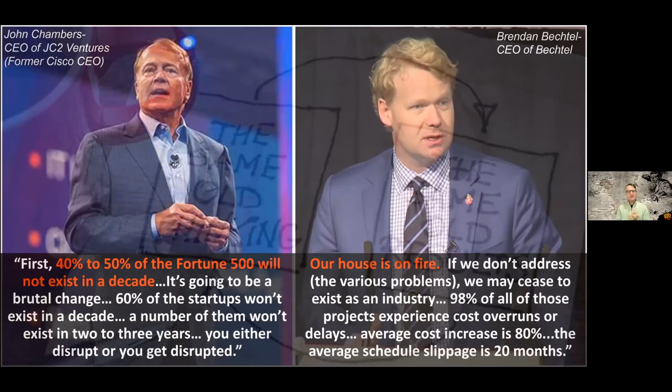So it's not just me saying this, one guy sitting in Texas trying to stir up trouble. John Chambers, former CEO of Cisco, is basically saying 40 to 50% of Fortune 500 companies will not exist in a decade. There's a reason for that, and it's not COVID. It's what we've been doing, it's what's been going on, and it's what's going to happen to these companies, whether they like it or not, in the next 10 years.

60% of startups won't exist in a decade, that we're looking at today, that we're really excited about today, that we think is the end-all be-all of today. And then you have one of our own, Brendan Bechtel, CEO of Bechtel, and many of you have heard him say this: our house is on fire.

From an industry standpoint, we're losing in so many ways. We're losing good people. We're losing efficiency on projects. We're losing schedule. Frankly, we're losing money.

And the reason for that is, to be honest with you, not all of us. It's the things that we keep thinking we're supposed to do in order to do something different. And it's like quicksand. It just keeps bringing us down and down and down. And I'm begging you to fight that.

What does it look like when we're fighting these inefficiencies? Well, take just seven of the Fortune 500 engineering and construction companies across the Dow in the U.S. You're talking about just 1.8% of a huge number, 77 billion in revenue, but 1.8%. Why can't we go crazy and try to get 2%, or why can't we go even more crazy and try to get 5 or 6 or 10% of that? I mean, the margins that we're okay with is insane.

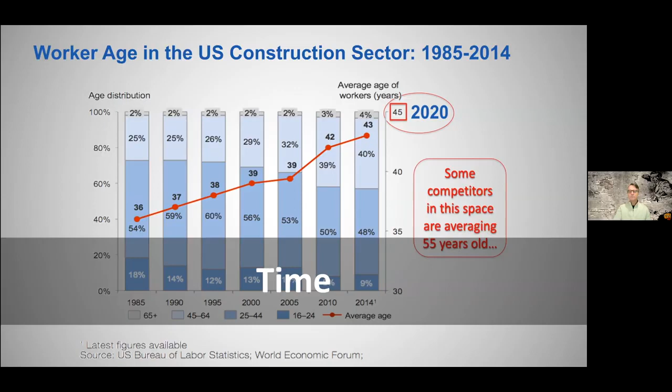Plus, we're fighting culture on a daily basis. At the very least, people are telling us to stay put, do not change. And at the very worst, they're telling us to slow down. I'm begging you to fight through that. Put up your fists, put up your dukes, walk right through that. Don't listen to that. We need to speed up. We need to go faster.

This is not about throwing more warm bodies at a project. It's not about trying to kill ourselves. I'm still talking about integrating, about innovating, about adoption of all these tools, all these procedures, all these processes that are in front of us. Adopt them faster, do better work, and do it quickly.

When I say new and different in my definition of innovation, what do I really mean? Is there anything really new or different? I'll talk about that in a minute, but every day is the future. You hear a lot at conferences and on LinkedIn, talking heads like myself, saying look to the future, I'm a futurist, we're going to be on different worlds in 100 years. I'm asking you to look just to tomorrow, the next day, a week ahead, a month ahead, a year ahead, because every day is the future, and I want you to take advantage of that. But having said that, let's for a second just look backwards.

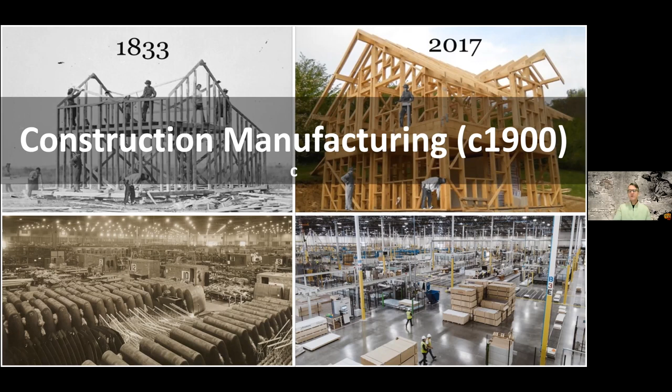Modular construction — I'm a huge fan of modular construction. I've created and spun out a couple of smaller modular construction startups. I am the poster child for let's go modular. What's crazy is we've had this since 1940, 1950. Amy and many others know this perfectly well. We're super excited about it in 2020, this is the latest and greatest innovation, but it's really not. We've had it for 50 years. Why in the hell have we not been doing this for the last 50 years and doing it excellently in 2020?

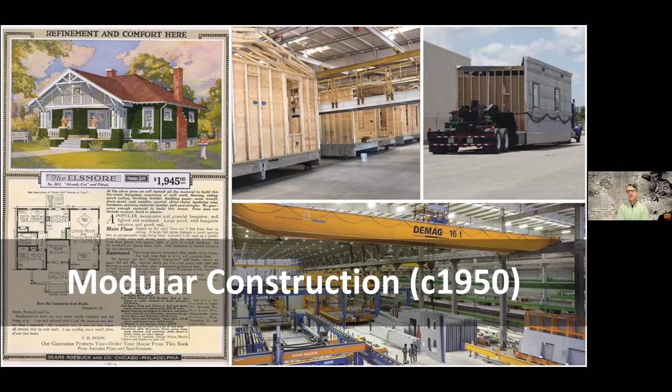All of these things that we think are scary and new and full of change today in 2020 have actually been here. We just haven't been told about them, or shown them, or allowed to pull them onto a project. I'm begging you to break through those barriers and tell everybody, look, we're not inventing anything right now. We're adopting, we're going forward, we're taking all of this great history we've had and actually making it viable.

Industrial robots, in the manufacturing sense, aren't just for putting together a Volkswagen or a BMW. It's for putting together a building today, tomorrow, the next day. Since 1950, for 50 years we've had this.

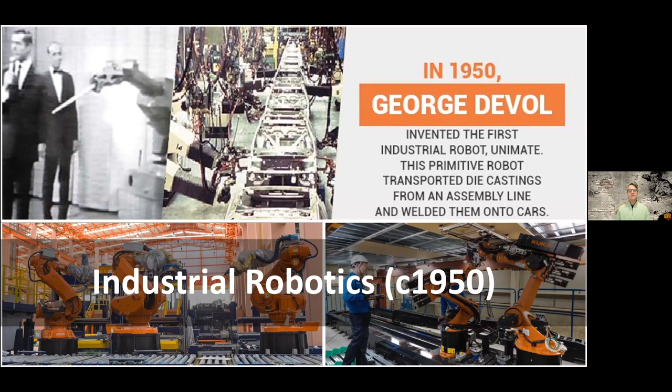For some reason, we want to pretend that we're unlike everybody else and can't use those innovative tools. By God, we can and we should, and we know how to do these things, and we should put those in our arsenal and innovate like crazy starting tomorrow. Even construction robotics - this is a huge field that's going to make a huge difference in the way we design, let alone construct.

This photo with Kennedy on the left-hand side is not a photoshopped photo. He's strolling past viable construction robots in the 60s, and here we are today getting super excited about something that's been around for 40, 50 years. But for some reason, we've been fearful of pulling it onto our industry platform, onto our job site, into our designs. I'm telling you, there's nothing to fear here. This is all good. This is all innovation.

This is all opportunity. Having said all of that, how do we scale all of this into our world now? It's not that we haven't had it - we've had it, and we've got it today. Now, how do we scale it into the world that we go through?

Sort of like I've been talking about, this innovation continuum that we've been on since the dawn of time - everything that we have today that we think is required, the cell phones, the cars, the PPE, the processes, the procedures, whether it was a document or an artifact, was impossible at some point. Some crazy person jumped out there and did some kind of prototype, some silly thing, and it looked impractical, and we laughed at them and pointed at them, frankly. But then a spark of genius showed up in each of us, and we thought, maybe it's possible. And then we said, wait, it's not only possible, I want it. We should have that. That's genius, right? And then it became scaled and required.

I'm asking you to jump into that. Everything should be expected. We should expect everything, to be honest with you. We should go after everything. We should have everything because we can. We're smart enough. We can do this thing. We can innovate the heck out of our industry and expect everything that you want can happen, can come to fruition, and it can be required.

Scaling this innovation is really important. And I'll give you the one secret word to scale across every industry, let alone ours: experiment. This is the one thing that I think our industry is really, really loath to adopt, and it's the one thing that has held us back for 50 to 100 years. That's experiment. We're so worried that we're going to spend money on things that don't work, and we're so worried about failing fast, or frankly failing at all.

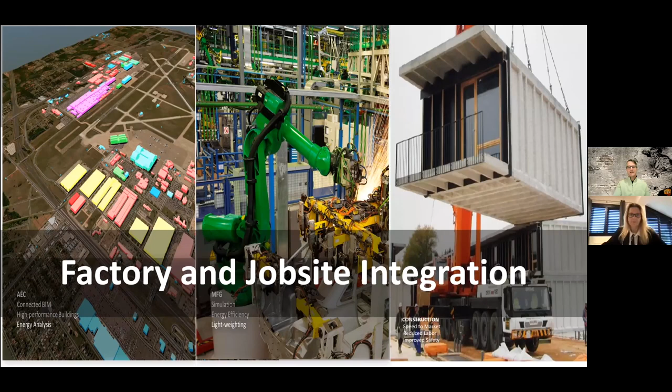So really understanding how we scale our business compared to who our real competitors are. And our real competitors are data competitors. They're competitors that are looking across at a platform perspective, not a project perspective. This is really where we need to be looking at: factory integration into the job site, IoT across our industry by 2035. All of these things are going to integrate and interconnect.

And finally, what does all of this mean? A significant impact that you are bringing to our industry. By 2050, 10 billion of us are going to be on the planet, 7 billion of us in the built environment that all of you design and create, creating a demand of 2x energy. We collectively are building buildings at 1,000 per day, and that number will only go up. The spend on what we do is only going to go up. Trillions and trillions of dollars in infrastructure. We're 6% of the global GDP demand.

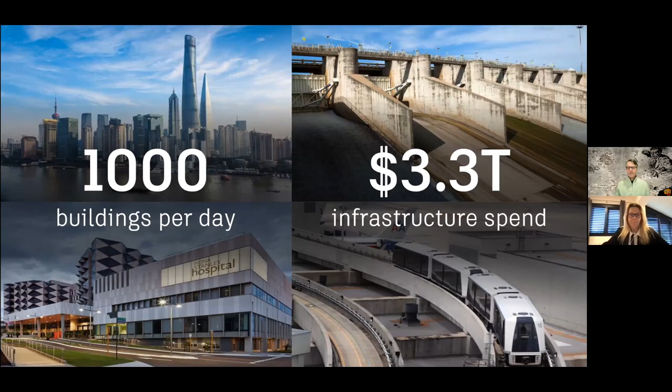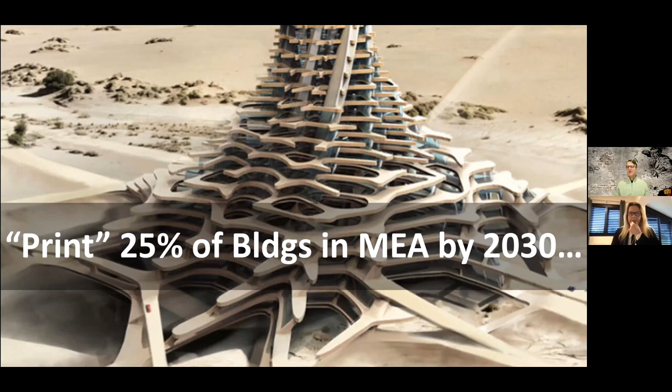And then you've got regional demands and requirements, and Ireland is in this as well, just as the United States is in EMEA and APAC. But you look at MEA, and they're talking about printing 25% of the buildings across their region by 2030, and that's nothing. Our own U.S. government, whether you love them or hate them, has basically put a flag not in the sand on planet Earth, but in the sand on Mars. We're talking about inhabiting Mars by 2030.

And even if you think that's silly, even if you don't believe that's going to happen, putting a flag that far out and failing gloriously is going to put us and our industry so far ahead of where we are today that it's going to have a huge significant impact.

So my call to arms here is: get in the ring and innovate everything, question everything. Look at what you're doing and try to make it not just a little bit better, but in a crazy, crazy, crazy amount better.

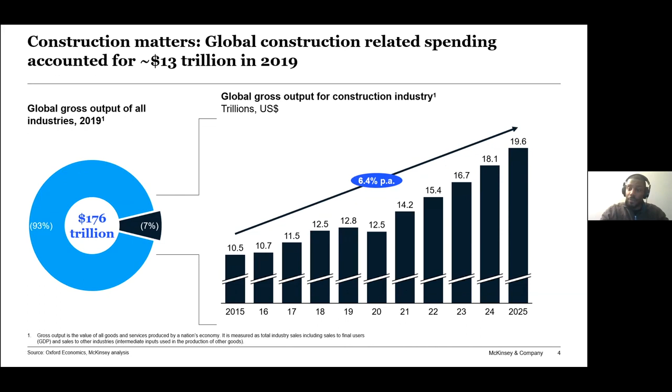So to put a point on some things that Chris said, construction is massive. If you think about construction as a national economy, it would be the third largest nation state in the world, behind the US and behind China. It was $13 trillion, I believe, of spend in 2019. So this is an absolutely massive industry, critical to the global economy. I won't belabor this point because Chris talked about it pretty eloquently during his talk, but there are some pretty significant...

...outcomes and dynamics that drag us down as an industry. When we think about the construction industry overall, it's a really fragmented industry globally. Everyone works on a project-based approach. There are generally misaligned contractual structures and incentives, and a lot of use of temporary contractors and staff. I think this contributes to risk aversion in the industry: a big general contractor is in many instances not necessarily executing - hands on hammers - a project, but managing the project and managing the risk around it. So you've gone from people investing in truly building the asset, with technical and project management expertise, to people managing the risk around the building of the project. And when you're a risk manager, you are naturally much more conservative than if your entire business hinges upon your ability to manage out risk.

So where does that get us? Lagging productivity growth, we've talked about that previously. Slow innovation and digitization, low profits - I know Chris quoted a number around 1.8% on average globally, we're looking at 4 or 5%. So that's not as bad as 1.8, but still nothing to write home about. And then low customer satisfaction overall - budgets and schedules are routinely overrun.

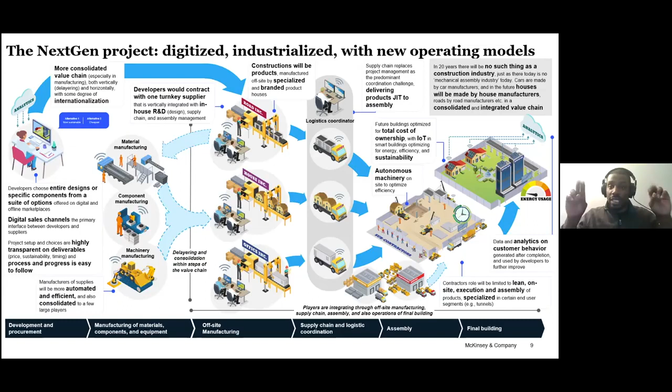Finally, when you look at contracting and execution, contractors and folks on site will need to produce a project at a much higher level of productivity, with what you'd consider the buzzword lean construction—execution and assembly specialized and focused on site at a much higher degree than we are right now.

So let's look at a couple of case studies about how this is actually happening right now. We made the statement that developers are choosing entire designs or specific components via digital marketplaces. In a sense, that's happening right now.

I picked a random manufacturer on the platform, so there's no specific focus on CEMEX here. There are lots of different building material suppliers. NBS Chorus and NBS Source effectively enable you, through BIM objects, to choose and specify the specific building material and supplier.

In some cases, this happens way back in the design and specification phase of a project. You have architects literally saying, I want CEMEX dry silo mortar in the masonry that's going in this area of my project. Through NBS Source, they can then go to that manufacturer or building material supplier and source the materials earlier.

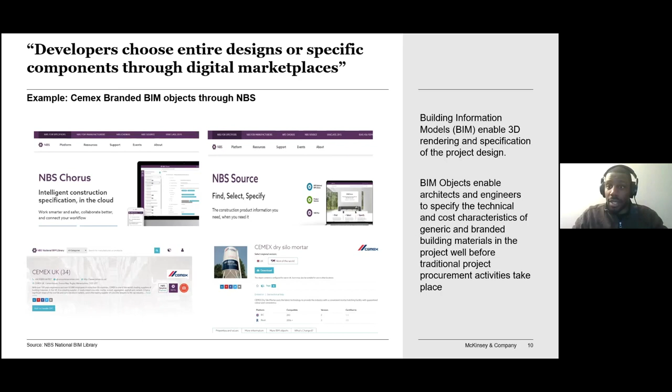So you're seeing a couple of things: developers shifting this procurement function earlier in the process by leveraging building information models and BIM objects, and the rise of digital marketplaces, as opposed to needing to go through a general contractor or even a distributor. You're able to specify these things and then access them digitally.

Developers will contract with one turnkey supplier. The market's global poster child for this is Katerra, but there are other players, most notably in the UK, Top Hat, that follow this model, where they own the production of the building end to end, all the way through architecture, design, and engineering through execution. While these are newer models, they won't be the last to adopt this approach. Now you're building a Katerra multifamily real estate asset, or a Top Hat single family home - a branded project, as opposed to just a bespoke house that Joe's Construction built somewhere.

Supply chain and project management are the primary coordination challenge. This is an example from 2019 in England, where Mace Group built factories on top of two high rises in Stratford, and had to manage the supply chain to bring building materials onto the factories, subassemble all the different components, and then do the fit out in each of those stories. They completed 18 stories in 18 weeks without raising the cost of execution.

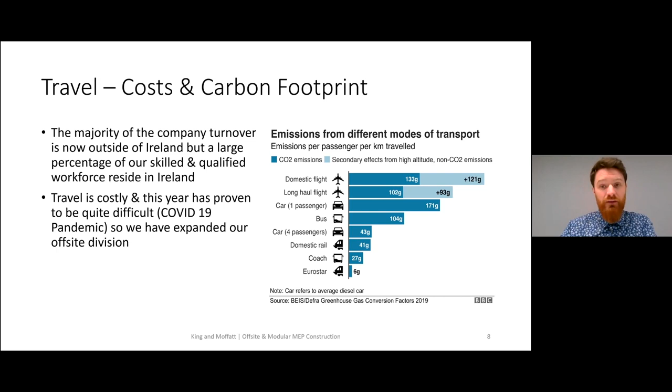Another reason we started looking at this was delivery issues. We find that doing some of the work off-site really eliminates issues we've had with deliveries of material to site. Deliveries from wholesalers usually never arrive when they're promised. So you could have a team on site go up and install brackets, and then the cable ladder might arrive a couple of days later, and the basket for your ELV stuff mightn't be there, so that might arrive a couple of days later. What's happening is people are returning to the same location on a construction site on numerous occasions to try and finish one task.

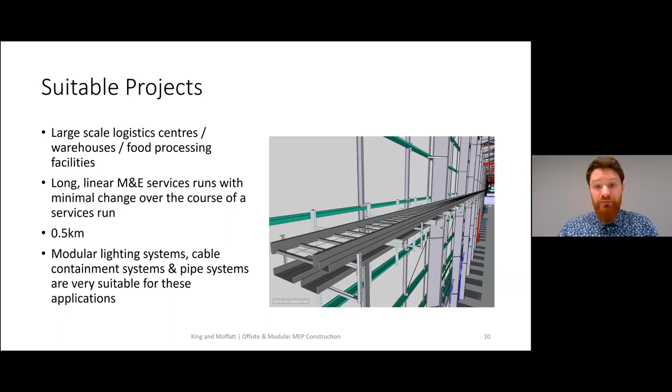Again, modular lighting systems, cable containment systems and pipe systems are very suitable for this. We've noticed an increase in safety because you're undertaking all the work in a controlled environment, and you're eliminating things like weather-related dangers associated with a construction site. If buildings aren't sealed you have wind or frost or other trip hazards, and falling from height accidents - you're taking all of those out of the mix.

There's less competing with other trades for workspace when an area becomes available. What I mean by that is sometimes when you're a subcontractor on site, like mechanical and electrical, you might have sprinkler or refrigeration, people putting in drywall and trying to get drop rods in, but you could be waiting for a concrete slab to be poured. What's happening then is everybody's racing into the same corner of a facility trying to get their services in, so it's increasing danger and it's less productive.

The most suitable tools for the tasks are permanently installed in a fixed location in an off-site facility, with all the PPE there beside them. You have dedicated workstations for assembly and cutting. So rather than cutting supports with a battery-powered angle grinder, you have a dedicated saw that can cut through full bales of unistrut, maybe 50 lengths in less than a minute. Again, it's saving time and it's safer work.

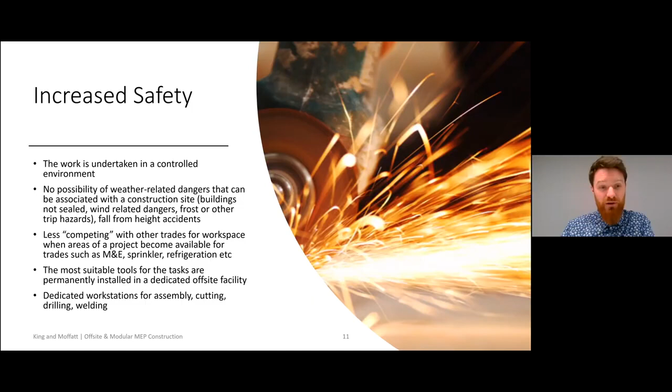Project programs and handover dates - these programs and the dates we have to hand over buildings, it's getting tighter and tighter every year. What's happening is we're getting into the jobs later, but the handover dates aren't changing. Sometimes we'd have weeks to get in and do a full install for a client with the main contractor and have to hand everything over.

Having the prefabricated M&E service modules ready for dispatch reduces the installation time on site. We can be building those while the structure is going up, the concrete is being poured, the building is getting sealed, and then as soon as the team on site are ready, we can have them on site within a day or two. If the job's in Ireland, it's within a day. If the job's in the UK or Germany, you can have it on site within 2 days. Instead of having to start everything from scratch on site when the area becomes available, you're really speeding up the time on site by doing this. All of the M&E modules are pre-assembled, so they just need to be lifted into position and connected to the structural elements. It's really reducing the amount of time we have to keep people on site.

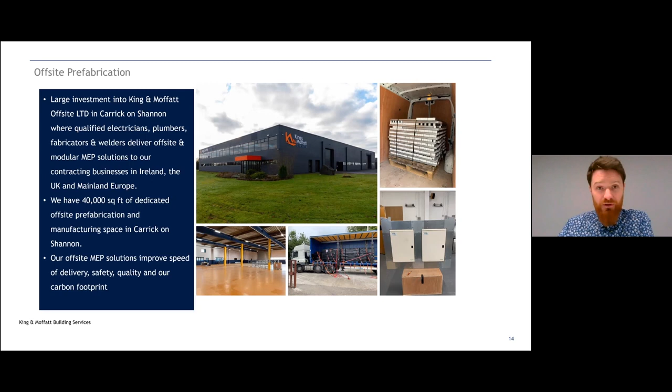I think coordination is the key to success when you're an M&E subcontractor. Without this, you're taking on huge risk, because you could go to site, have to do it off site and then have to do it again on site - you're really starting to lose time and money. So for a new build, I think the coordination with the other stakeholders is key, and we use BIM to coordinate with other stakeholders on a project.

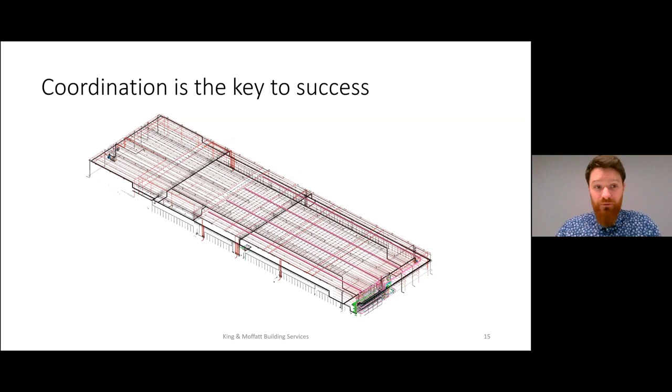We really try to have fully clash-free models before we start any work on site, or before we commit to building MEP modules off-site, because it's a huge risk for any company to take if you get to site and realize, well, this contractor hasn't delivered in BIM, but because of the regulations in this country, they can't move - they have to be in that position. You'll have to move this duct, or these pipes, or this cable containment. So that's why having a coordinated first-off is key for us. I think it's vital that everybody has bought into this whole process from the beginning of the project.

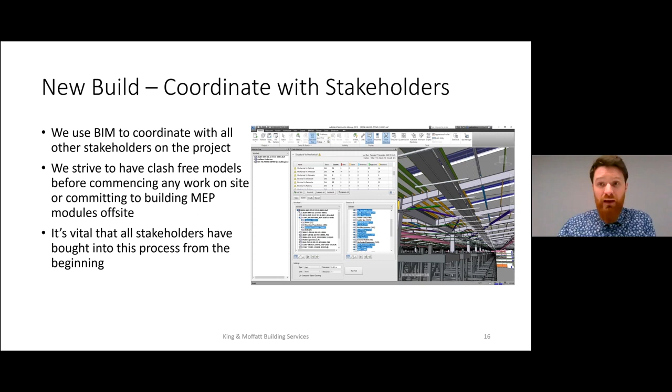For any existing buildings, we go in and laser scan them. Just a very short video here that will show a bit of the process, but I think after doing this, you have an exact representation of what's on site. So again, it allows you to move forward with confidence.

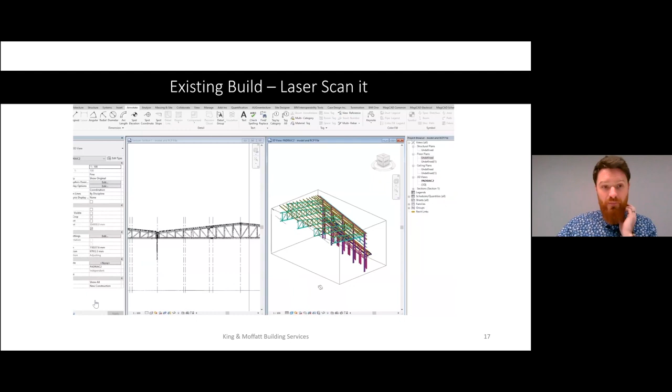So basically that video was if we were going into an existing project and it's not a BIM project and there's no 3D models available, but we still want to try and do as much as we can off-site. We go in to get a real picture of what it is, we laser scan it, and then bring that back. That gives us a point cloud, we build a model of the point cloud, and then we're able to coordinate all our services, supports, main routes and spines of services within the building, and we know when we arrive on site that it's all going to work.

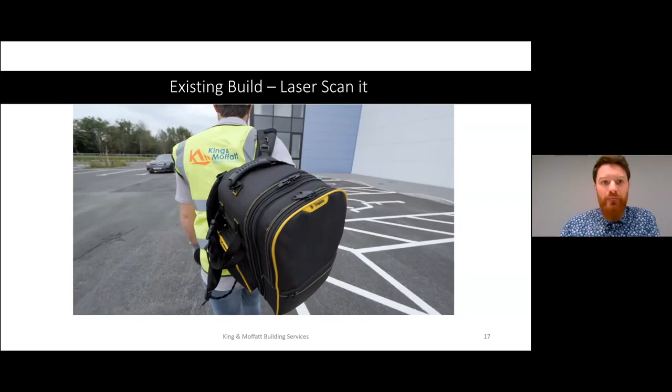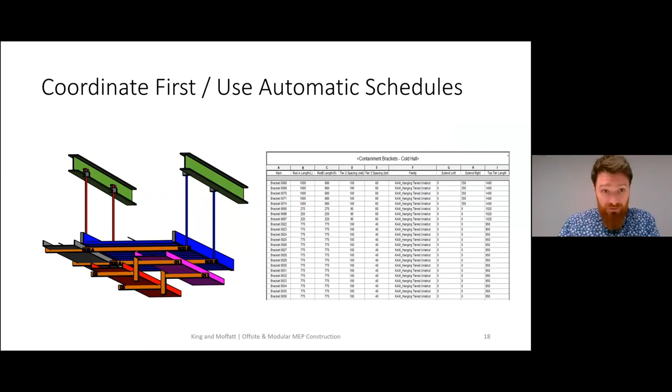We also use BIM to take out all of the information, so there's no manual takeoffs or manual counting because we use BIM. After we've built all the brackets, we're able to take everything out of a schedule straight out of Revit on the right-hand side, and that can go straight over to offsite. We've actually developed this further in the last couple of months, and we'll go into that later on.

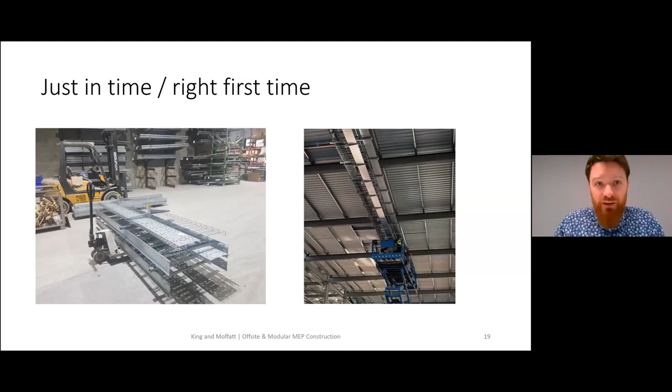We can get all of our stuff to site in time, and it's right first time when we do this process. Another thing is we can quickly check the stock levels at offsite before sending module information over. So before we send the details of a linear run of modules, the MEP modules, over to offsite, we can quickly send them information from a schedule out of Revit, and they can check if they have enough stock for all the different types of supports, whether it be pipework, cable ladder, or data basket. They can very quickly establish that we need to order more of this because there's a delivery coming, and the modules are going to contain this.

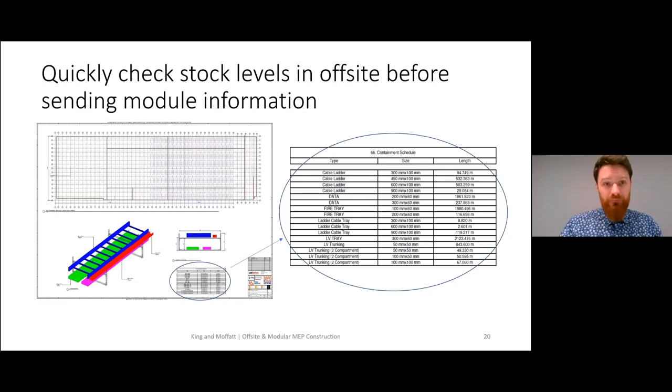A big focus is on combining the M&E services and the modules that we send out to site. We send a team out, and if brackets or modules are put up, we think it's pointless to have another team go out and do the exact same thing for the mechanical element if someone's already gone up and done it for the electrical element. So sharing bracketry, doing all the load calculations and the structure, and getting them approved before you install them on site is very important. By doing that, you're saving time and money, and eliminating double jobbing associated with it.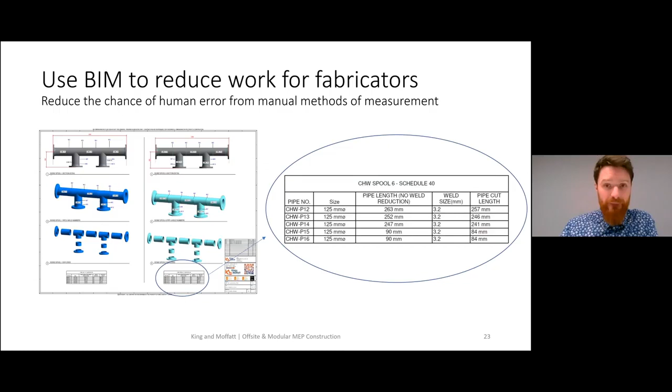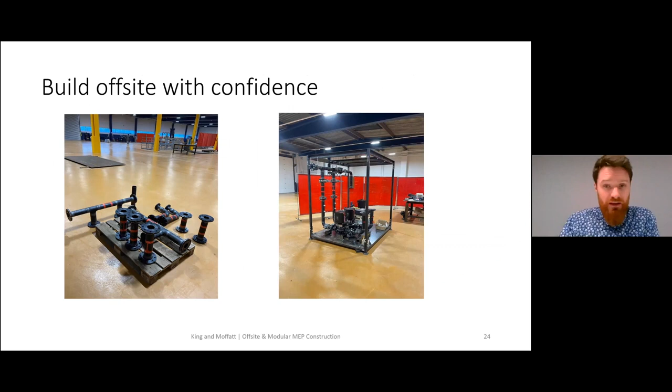There's no manual takeoffs or manual measurements needed if you use BIM, and you can do everything with confidence. That's what I feel when you have that reassurance. And again, for any kind of linear modular systems we're doing, if you've gone to the effort of building it up in your Revit model, use the power of BIM to give you that information automatically back out in a schedule. That's an important step.

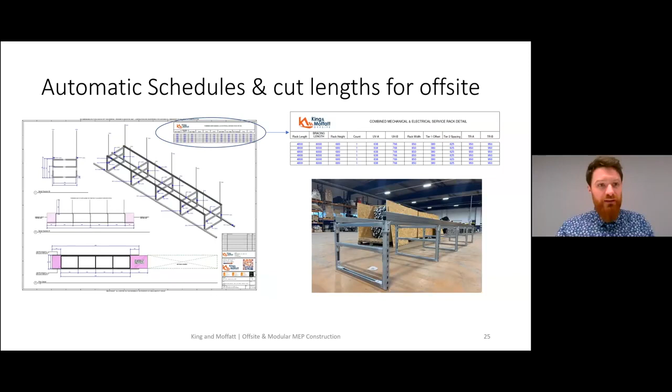Another thing I'd advise is to standardize where possible. Typically on a project, you might have distribution boards, so your cables out to your lights and sockets all come back to a distribution board, which looks basically like this on the screen. You can have an 8-way, 12-way, 16-way and 24-way, but we've standardized it to 12s and 24s, and we've bought them in bulk into the facility. So even if an 8-way would suffice for a certain project, we don't do that. It's basically 12-way, and they can be pre-assembled and ready to take straight off the shelf and start putting up all the trunking around them, prepared to be sent out to site.

This is something on site that takes a lot of time. It's hard to get it looking right, and a lot of the time the containment surrounding those distribution boards, the wrong 90-degree bends can arrive to site - they're a specialist type. So again, that eliminates all the time and labor you could lose on site by doing this.

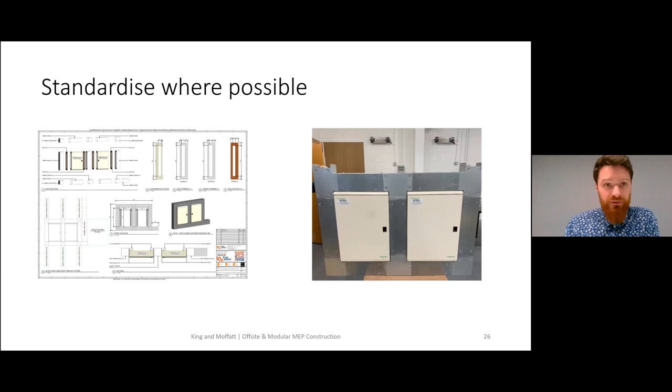And again, standardizing it - if we're doing up supports for any of our M&E installations, we have in our template, on the left-hand side of the screen, only these options for our BIM coordinators to choose from. This automatically puts it into a schedule with that whole naming convention, so it's something the guys don't even need to draw on for offsite. Exactly what's required, and the information on what part of a structure you're fixing to, is all contained within this. So it's totally automated - if a BIM coordinator just starts adding all the bracketry for the services, they don't even need to think about doing anything else. When it's done, this schedule can go to offsite, and within a day it can be ready for shipping out to site.

So again, standardizing and automation. There's probably a lot of people going to be talking about it today. I'd love if we could do more of it, but I still believe with the different specs, regulations, clients and main contractors, it's quite difficult at the moment.

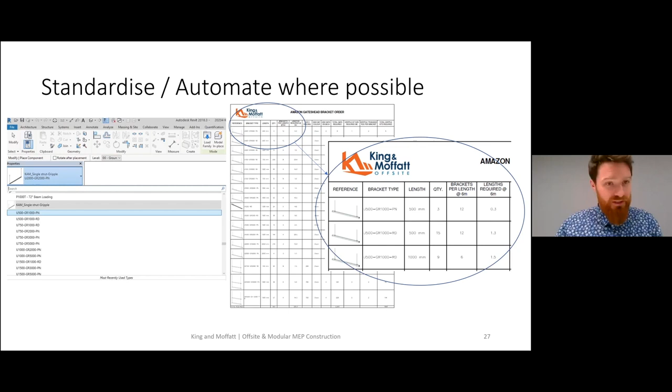If you're getting into offsite, try and look at solutions that are easier to ship and transport. So you have your wire suspension systems there instead of threaded rods. They're way easier to transport, they take up a lot less space, and you're eliminating hotworks on site. If they need to move up and down on a hanger, you don't need to cut them with angle grinders.

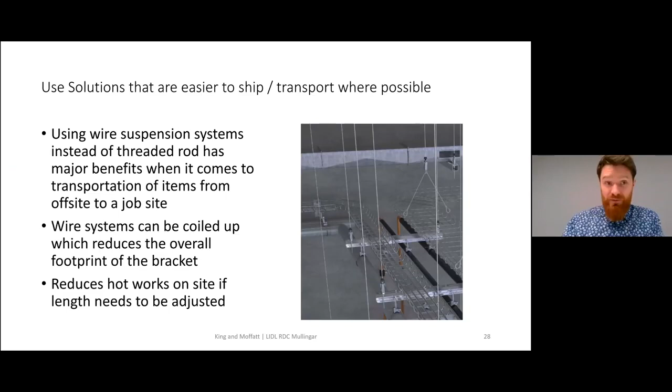Transportation, almost finished here now. I see Claire is coming up as well. Just as a quick example, from left to right, you have 86 cantilever brackets in the first package. In the second package, you have 500 2-meter struts with 5-meter wire suspensions in the next pallet over. That'll give you an idea, if you're using wire systems, how much space and time you can save, and again, reducing the hotworks when you hit the site.

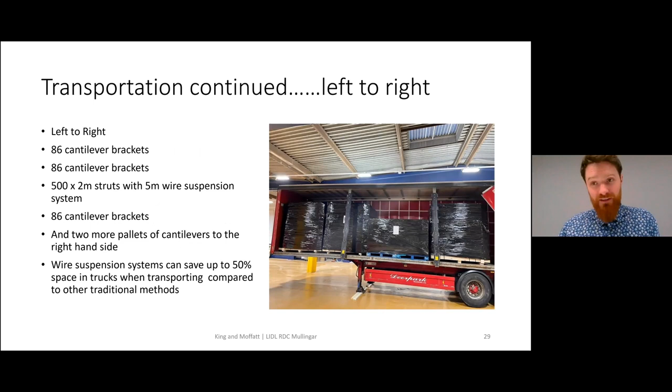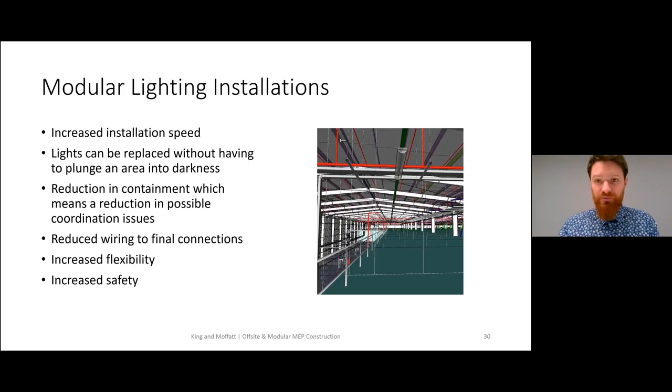Modular lighting systems, again, you just hang them up and plug in your lights. Each one doesn't have to be wired separately. You can take the light fitting off them without plunging a full circuit into darkness. There's greater flexibility if a client wants to move them in future. They're not fixed. And just a couple of the benefits very quickly, and that's me finished, everybody.

Huge savings on travel costs and wasted time associated with travel, reducing the carbon footprint. Safety benefits like the controlled environment and suitable cutting, drilling and grinding stations and tools there full time. It's helping us with programs on site. We have way better control now of when everything is arriving to site, and there's less time required to install it on site. It's eliminating a lot of paperwork associated with RAMs and hotworks permits.

Saving on labour costs, so the site team aren't standing around waiting to get access into an area of a project. Saving on material costs, because it's exact ordering of materials, and we're buying in bulk into one location now, and there's a saving associated with that. It's made a lot of our elements of our workflow much more lean. And main contractors and clients love to see it. We're just going to continue to push this aspect of the business over the next 12 months.

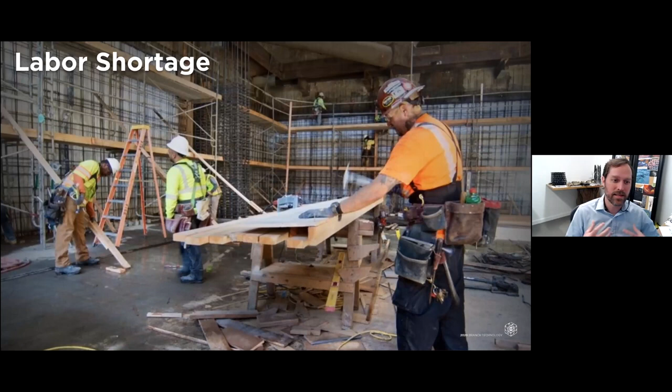Talking to most general contractors and subcontractors, asking them what their number one problem would be, most of them would say finding qualified people. They can't really find qualified people, so the ones that are out there, they have to incentivize through higher pay. So we have this rising labor cost, and we're overspending on that labor.

So second question: what if you could galvanize a new workforce and bring in some of these millennials or Gen Zs?

We've seen this chart many times. That labor we're spending a lot on is not really productive when compared to manufacturing. So the third question: what if you could double or triple your productivity?

The way we make things is we take a huge chunk of earth from one place to another. We harvest it, move it, refine it, process it, productize it, then we warehouse it, ship it to a site, and then for that bespoke building, we take that component of a given size and cut and carve out of it for that custom building, then throw the remainder in another big pile. So what waste? Next question: what if you could only use the material necessary to build custom buildings?

And then last question: what we've seen in the computer and the ability to create for the last 20 years is almost impossible with traditional methods of construction. It's this digital divide. So what if you could make that impossibility a possibility?

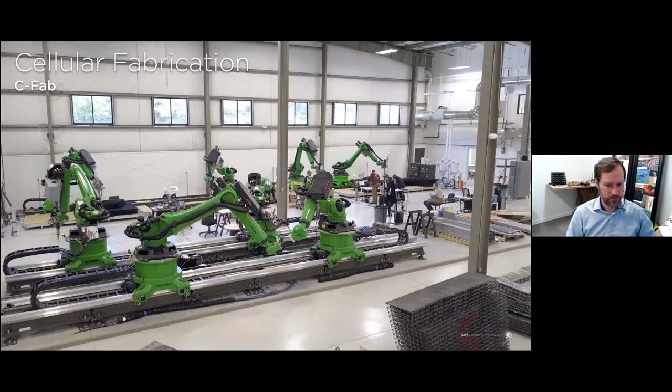So our approach is a bit different. We use large-scale 3D printing, but instead of a layer-by-layer approach, we use a unit geometry of a cell. It's a process called cellular fabrication.

Hopefully this video will play smoothly. Our software creates the internal geometry and sequences a custom path plan for a large-scale industrial robot, using freeform 3D printing that we've developed, where material solidifies in open space.

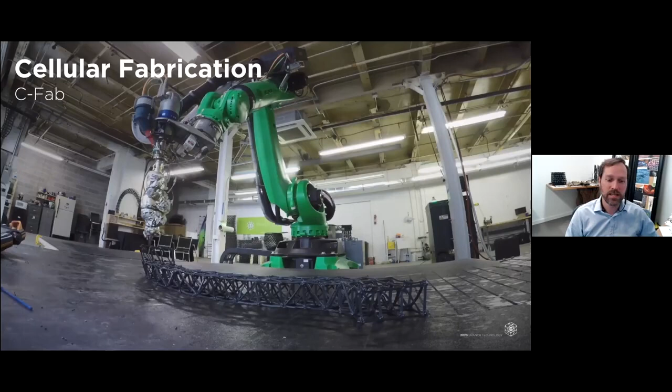What you're seeing uses 20 times less material than a solid print process. In this case, it's carbon fiber reinforced polymer, where a 2-pound block can support 3,000 pounds.

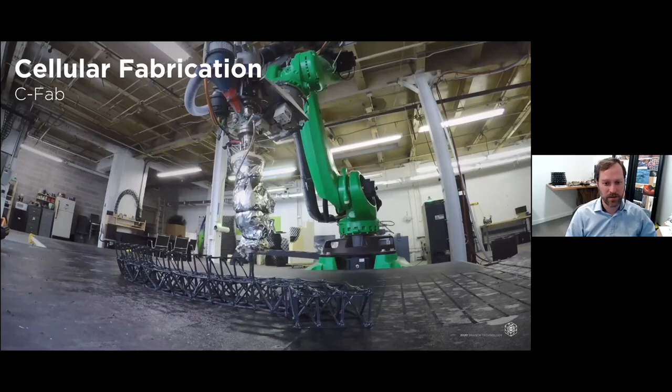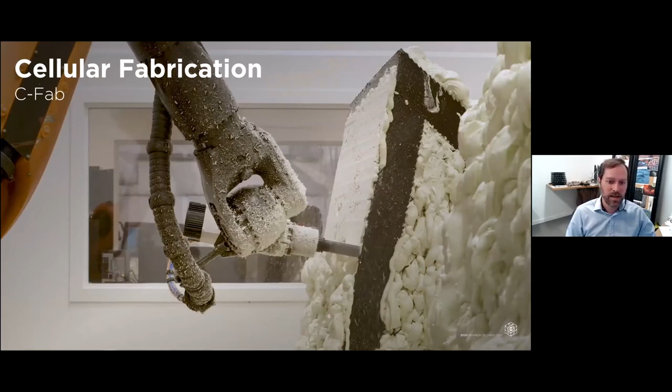We take that kind of skeletal structure and fill it with fire-rated commercial grade spray foam, then mill that down robotically to get to the custom surface finish. Now instead of 3,000 pounds, that same block can support 6,000 to 10,000 pounds depending on the density of those cells. That's about 3 to 4 times the strength of normal wall framing methods.

So this is direct digital manufacturing. We start with that 3D model, and it flows through our software stack. What we digitally produce and sell are those custom components that can take on almost any shape.

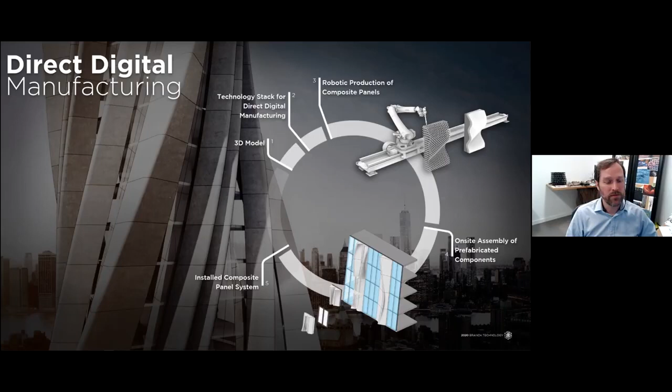Those are then shipped to the job site and fit together like big Legos on site. So what we're making right now are these prefabricated next generation wall systems.

It's a custom facade for a commercial building, creating that signature identity. It attaches back to the structure of the building and becomes the outer skin. These panels are lightweight, strong, fast to install, and have 10 times the design freedom of traditional methods.

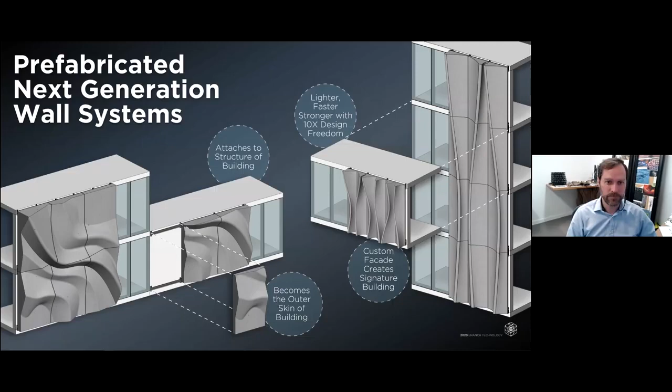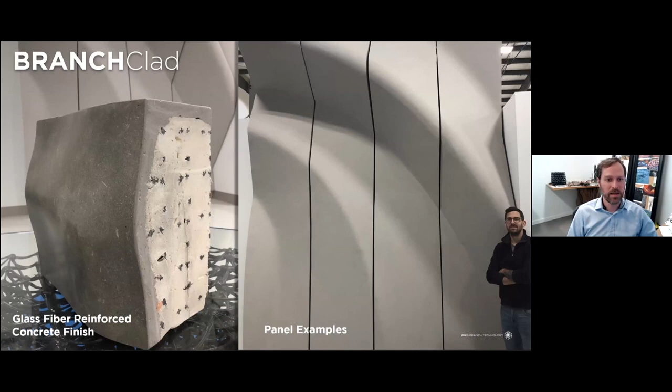Technically it's a ventilated rain screen that is outboard of the weather barrier of the building, hanging on just the traditional carriage system for rain screen. So those panels hang on that carriage system.

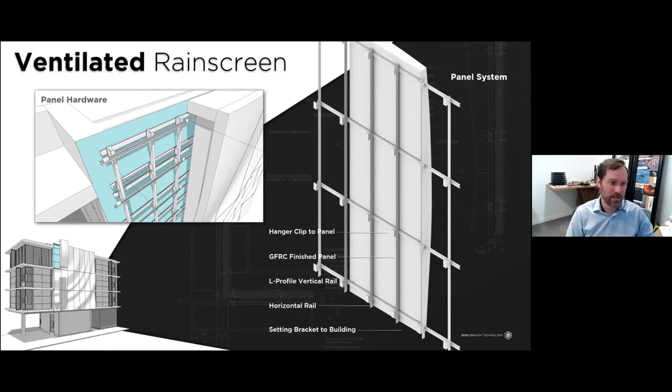So what this is doing is taking something that would be like a very boring 80s office park. This was an example project somebody asked us to look at, and we showed what could be done by applying different patterns to that skin. What this is really doing is creating signature identity, and especially in COVID, where we all have to set ourselves apart in some way to survive, this gives that ability to distinguish from just all the boring boxes.

So a couple examples. This one is installing now. We're based in Chattanooga, Tennessee, in the southeast of the US, so this is here in Chattanooga. It's a bank, and our design team created several different schemes showing some of the digital possibilities. The client selected this one because it emulated their logo and kind of waved across the facade. This has now been prefabricated and it's going on site now.

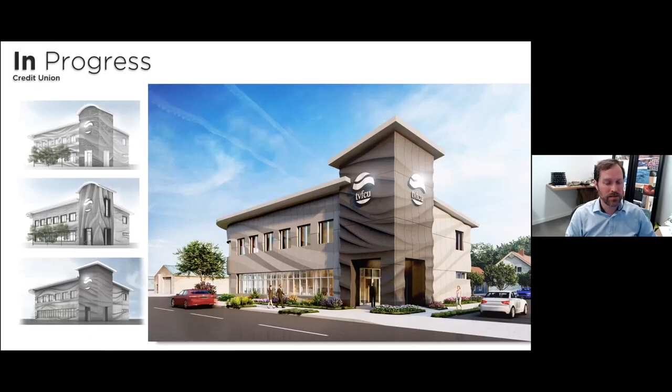This is another project, a parking deck for the city of Huntsville. Our design team created several different schemes, and the client chose this one. This is working with Turner Construction, who won the bid for this project, and the parking deck is under construction right now. We actually put the panels into fabrication this week, which will start installation in March of next year.

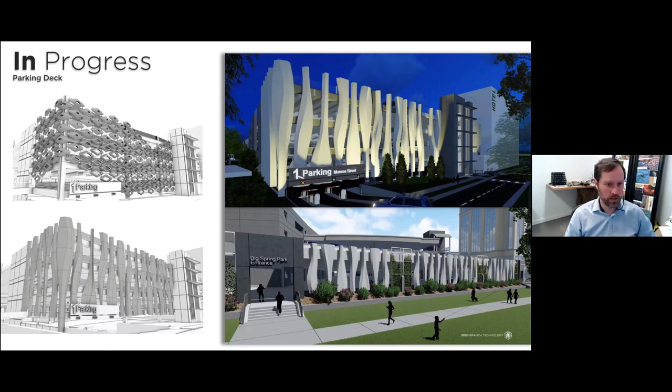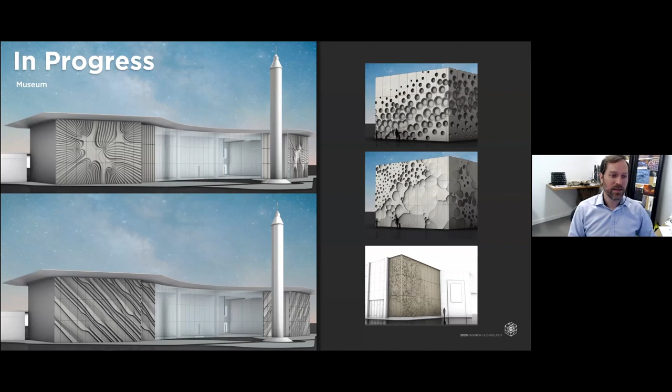And then another project, this is for a museum that's space related, using different themes you could see having to do with rocketry or places you might go. What we did is we took a scan of the moon and literally put that onto the facade of the building. So when people come up to this building, they'll see the texture of the moon on the surface of that facade.

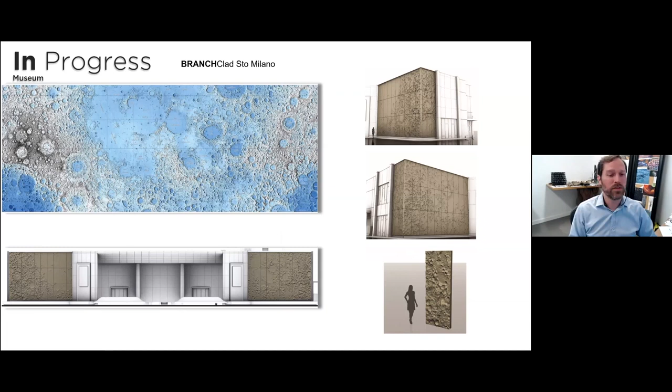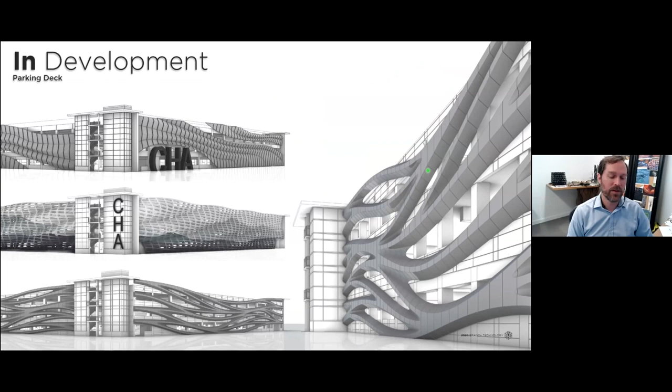Working with a design build team, going after an RFP, we created 3 different schemes for a parking deck local here to Chattanooga, based on things that are thematic here, like rivers, mountains, and outdoor environments where the interweaving limbs of trees come together. Our team selected this one to move forward with, and that's what it ended up presenting like at the final presentation. Our team won that solicitation, and it's under construction right now.

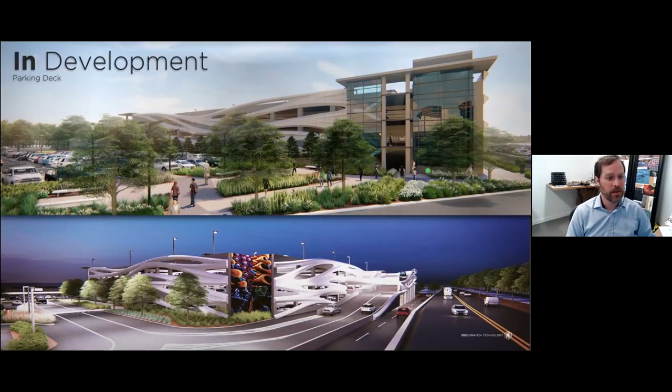And then another example for a mixed-use urban environment outside of New York. This was for the podium level of a much larger development, with a couple different options. So those are all in that facade and what we're calling branch clad.

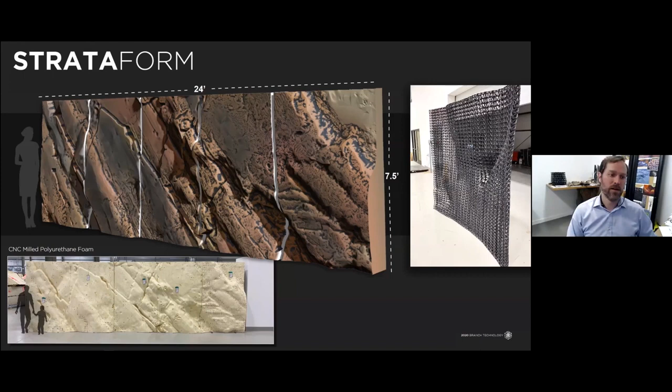Another category of product that prior to COVID was pretty hot is called digital rock work. This is something that's normally a very manual, on-site carving concrete process in the theme environment. What we were doing is taking that very articulated surface and digitally doing that. You can see some of the articulation you can get with it. That's a 7-foot tall panel, and I think it weighed about 30 pounds, that's the beginning point for something that typically would be about 3,000 pounds. Then those pieces come together as components and make larger assemblies.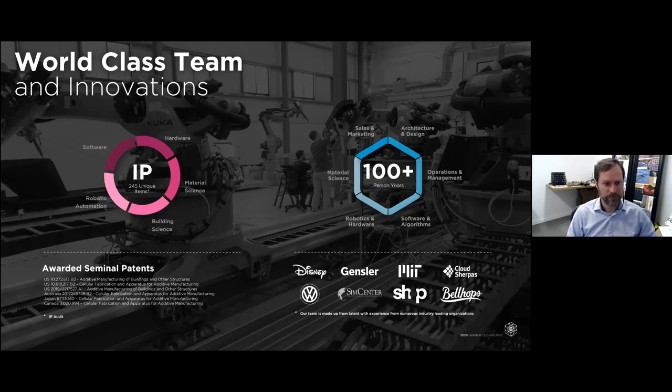These projects oftentimes are the first of their type in the world, and so they garner a lot of press. And so we've received the benefit of that. And that's been a great thing that I'm very thankful for.

Working with some amazing partners and clients over the years, and then backers that have been a part of this. I started this about 7 years ago, and back then there was very, very little investment money focused on construction tech.

I'm thankful, and you're really the first people to hear about it because it gets announced today, is that we closed a new round of funding led by a construction tech company called Equipment Share. And so we're excited for this next chapter that opens up.

So you guys are familiar with prefab and all of the benefits that brings to the table when you're doing off-site construction: predictable time, predictable budget, factory level quality and efficiency. Well, this brings all of that, and then the inherent customization that 3D printing brings to the table. So instead of it looking like a cookie cutter box, every single thing can be custom. It's the marriage of those two capabilities.

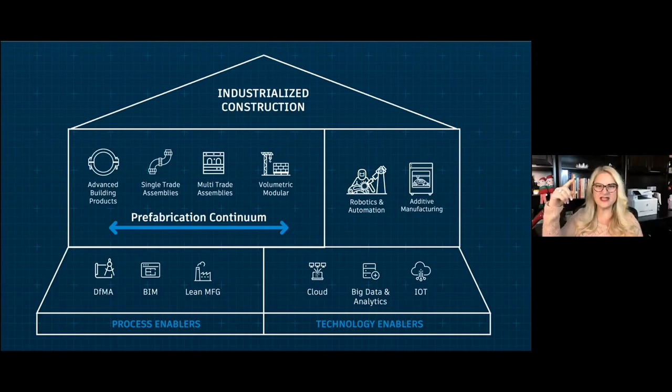And then design for manufacturing and assembly does not mean prefab. I feel like in Europe, you guys love to say it as if it means prefab. It's actually an enabling methodology that gets you prefab downstream. And if you truly understand DFMA, you'll have optimized prefabrication downstream. It's real hard to assemble construction with stick-built design. That's what you should think about.

You move up to the physicality of the prefabrication continuum. Again, I like to think of prefabrication as the terminology—you have on-site prefabrication and off-site prefabrication. Advanced building products, materials that reduce drying time, curing time, welding time, that hot work—anything you can buy from a manufacturer that gets better flow on the job site. They're usually slightly more expensive than their not-so-smart counterparts, but you're not looking at the first cost of the material. You're really thinking about flow for the job site, removing labor from the job site.

And single trade assemblies, that makes sense, right? To you guys, electrical whips, could be pipe spools, could be light gauge frame panels, or even a precast wall. Multi-trade assembly, again, self-explanatory—there are both volumetric and non-volumetric multi-trade assemblies, but that's where really all the action is at lately. And then you get to volumetric modular. They are not in a hierarchy on purpose. Volumetric modular is not the best application, neither is single or multi-trade, right? They are not mutually exclusive. They are a toolkit of parts, and you use the best one for the right application.

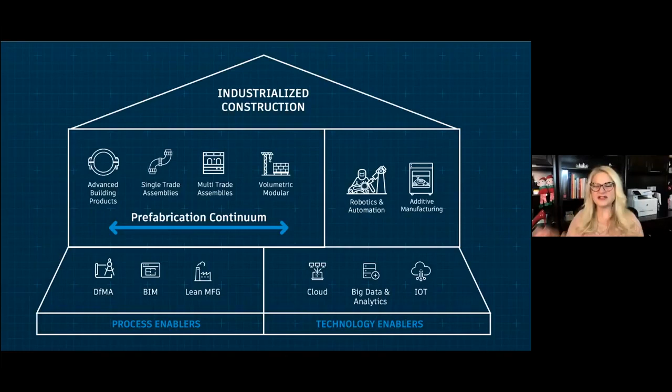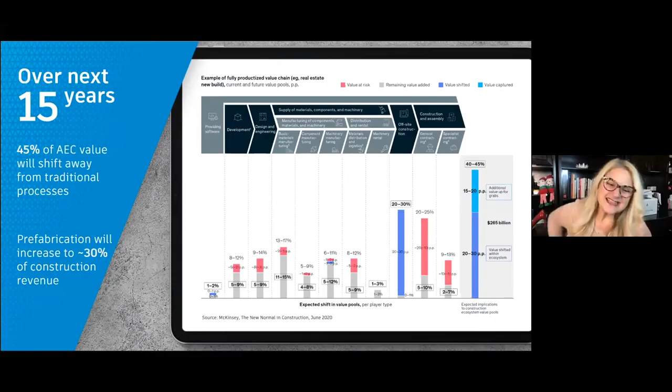I won't go too much into this because Josh obviously did an amazing job. My only thing—and I love that even Josh recognizes, and somebody else on the panel too—is that we're talking about what the next 15 years might look like. And I believe that it's been happening already. I know McKinsey does as well. But if you haven't read that book, Who Moved My Cheese, now's the time. There's very little cheese left in our ecosystem.

So if you haven't adjusted your internal processes, your learning, your tools, your training, your culture to understand that this is changing—it's not a journey anymore, it's a race. And you may not be in the race right now if you haven't made some adjustments to what you're doing now. So it's like a vice on our ecosystem. And I say ecosystem on purpose, because we're not an industry—we are an ecosystem of lots of different industries. You've got those big serial owners people are talking about in the chat, and they're asking for this.

They're kind of tired of having big programs over multiple geos that have no consistency in cost and schedule when they know they need operational consistency. One of my best serial owners actually uses the phrase, I'll take certainty over savings every time.

So we have governments that are requiring it and incentivizing it. I've worked with the government of Singapore for many years and lots of other places that are really asking for three things: digitization, prefabrication, industrialized construction, and decarbonization. You'll see that even more as COVID has continued.

But we have a lot of global proof points. You can't go anywhere without seeing a front page story, mostly, unfortunately, about volumetric modular, because it's kind of sexy, I think. But we've got subcontractors, specifically the MEP subcontractors like Mr. King over there, who've been recognizing the value of prefabrication for many years.

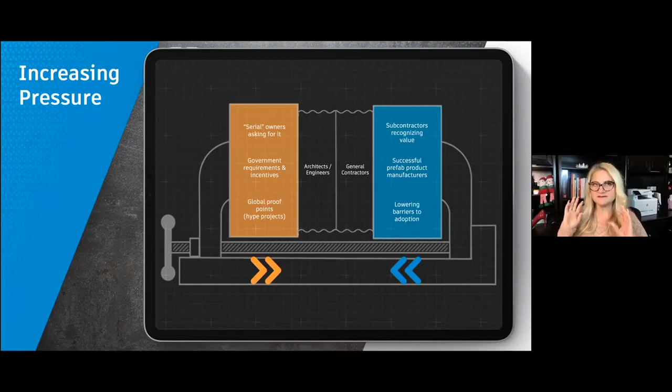But what those companies do for us is they show us a vision of the future. And I'm not saying they won't be here in the future, but I think you'll see a lot more of the players that have been in the space actually coming up and either buying some of those companies, adopting their methodologies, or just showcasing some of the stuff they've already been doing, like Patrick did.

And we're in a global economy, so there's lower barriers to adoption. But what's happening to some of our siloed players?

The general contractors are getting squeezed. They may or may not know how to integrate some of these pieces and parts. Most of them have actually started buying factories so they could sort of take over the silo next to them.

And then you have architects and engineers. Aside from some of the investments you just heard about, they're also buying fab shops. They want to design and fab because they are also trying to figure out the value proposition of what the new normal looks like. Then you have COVID, and it's squeezing us even harder, right?

You've got to change. There's a lot of pressure. If you don't feel that now, you're probably not going to be here. You're just a little bit numb potentially.

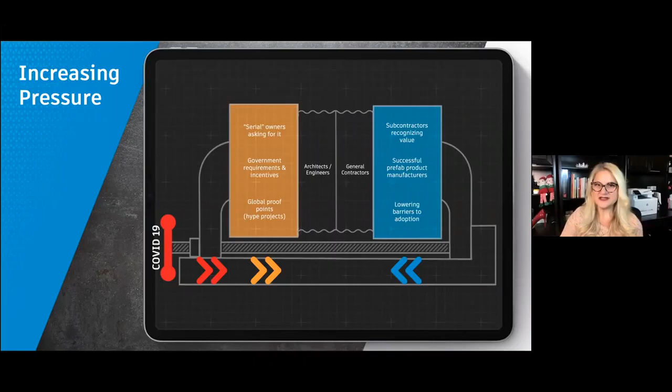So what does that mean for us? Well, it's one thing to say we've got to change our thinking, we've got to do this stuff. We've got to actually move the information of make, which is manufacture and construct, and operate, which are things like carbon and life cycle of these materials and what we're going to do for them for the environment later. You've got to move all that information digitally up into design.

That's called DFMA. Currently, our only solution is you should bring me up into the front of the process and I'll teach you how to work with my prefabricated element. Well, I'm 49. I'm sort of tired of getting to the front of the process where I have to speak out what I need for DFMA principles.

I would rather teach the computer with machine learning and AI to take all the information of these products and pick the right ones together, and also take what I'm doing and optimize that, because it's much smarter than I am. Again, I'm kind of old here, but we're not using the technology that already exists, things like generative design and computational design.

And an enabled connected platform to really do this correctly. And it's not like anything needs to be invented. So just let me tell you that.

I like to tell the story. One of my friends said they tried to go digital on all of their contracts, and for 3 years he was struggling with that. It's a friend of mine who's a mechanical contractor. He said 3 days after COVID, somehow they got that done. And I was like, look, new technology wasn't invented when COVID happened.

We're just treating it differently. We're behaving and interacting with that differently. Just want to let you guys know that, right? So anyway, change your behavior and thought process, but behavior is more important, right?

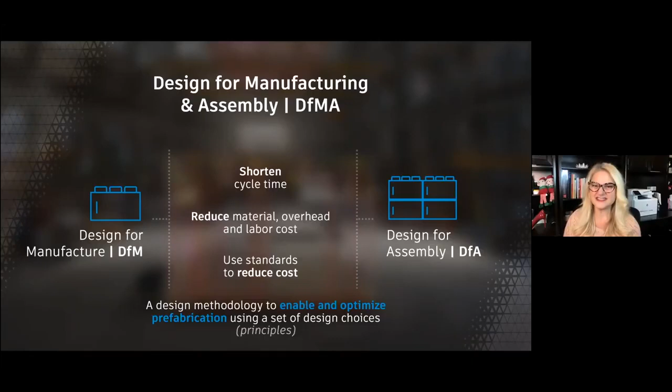We've concatenated those two terms to be called DFMA. So what are we really trying to do? We're trying to shorten design cycle times, fabrication cycle times, and installation cycle times. We talked about concurrency, doing things while you're doing things on site. That helps too. We want to reduce material, overhead, and labor costs, and create better standards to reduce cost. But these are all enabled and optimized through the design choices, and they are both generic DFMA principles and some that are very element specific.

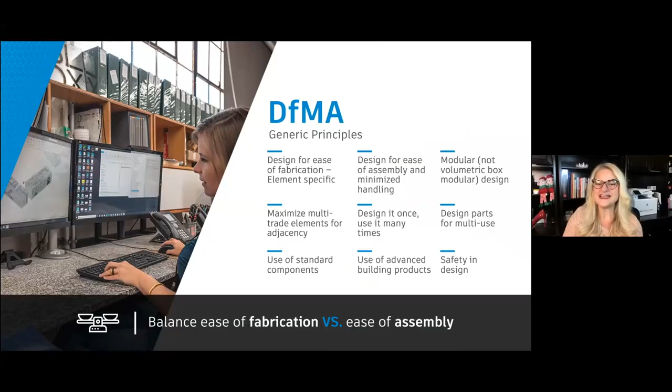So these are the generic ones that I teach. We're not going to go into them today too often, but design it once and use it many times is one of them. Those are easy. Here's where it gets hard.

There are element specific instructions that you need to understand from the person making it. If you multiply just the 55 instructions that go along with this precast wall panel, and then multiply it by the number of other pieces in that building, and then multiply those by the number of proprietary systems that could potentially exist on this planet to use, it would make any architect's head explode. So we can't keep doing this by hand.

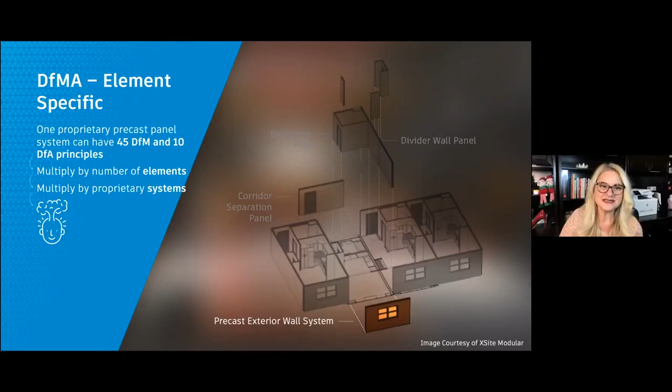I used to own my own company, and I've traveled the world teaching these processes, but in reality we've got to move to technology to enable this. Most of my friends didn't understand why I came to Autodesk. When I explained it this way, they were like, wow, that makes perfect sense. The only way I could actually make impact on the space anymore is by coming here to Autodesk, where we can actually create some change.

So prefabrication is more than just these boxes. I want to leave you for sure with that. And by the way, we hear a lot of stuff about housing and hotels, but in reality, where all the money is spent right now, the big money is in all of these places where there's heavy MEP integration. By the way, the mechanical contractors I know are like the most humble, nicest guys in the world.

This has been going on for about 25 years. They've been fabbing. It's all those places behind the walls, underground, above the ceiling, in the central utility, where it's been going on all along, whether the architect, engineer, or even the general contractor recognized it or not. These guys have been fabbing for a few decades because it's the only way they could survive, by getting more and more productive and safer.

So this is where we should really be focusing some of our efforts, because not just in the future, but in the US, there was a study that said two-thirds of general contractors and three-quarters of trade contractors report experience in the past three years, now four years, with MEP multi-trade assemblies. It's becoming standard practice for intensive projects. That's not 15 years from now, that's now.

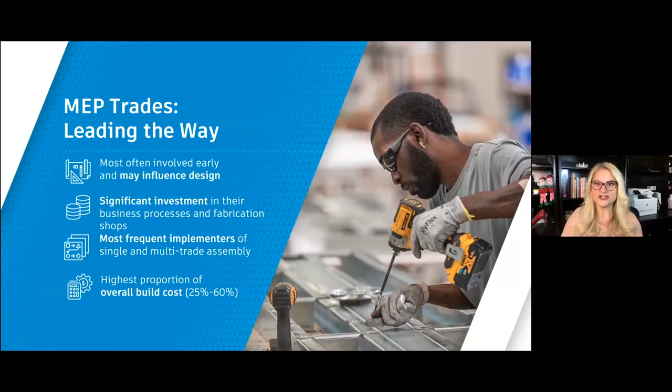So the MEP trades, I believe, and some of the structure guys, are actually leading the charge, for the record. So what's our strategy now that we know that? I came here to make a difference at Autodesk, and here's what we're going to do. First, we need to make DFMA and prefabrication easier. We can't keep leaving it in the hands of people like me that are aging out of the space and wanting to retire soon. So we've got to embed that and connect the Autodesk platform with this ecosystem. Now, Autodesk platform doesn't just mean our software.

It's a platform that has our product portfolio in it and enables partners and other people's software to interact, so we can get connectivity of the real discrete data that's going to help us be very functional. And we need to create a collaborative AEC community so that my friends don't call me from around the world and ask me questions. When I retire, I want them to go to a place, and so do all my friends that are in this space. They want this learning to live in a place where you could stand on the shoulders of it and get better and better, where we're capturing it for people around the world.

So let's talk about productization for a minute. By the way, I said snowflakes. What do I mean by that? We will never get transformational in our ecosystem unless we start learning.

And you can't learn when you do something for the first time every time, right? So think about when you've installed equipment on your factory floor. The first day you open it, you're not that productive. There's a learning curve to that.

But most people right now are living in this initial ad hoc or repeatable phase. Even if they're doing prefabrication and doing DFMA, they are basically waiting to take drawings and then they're cutting them up in the way in which it's best to fabricate.

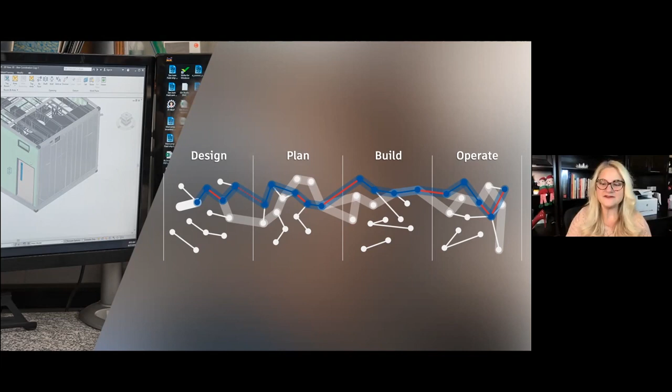And so, by the way, I think the future—I have a minute and 15 seconds left. I got to tell you about the future in a minute and 10 seconds now. We're very siloed. I just wrote a paper called Creative Destruction: Breaking Down Silos for the New Possible. And I don't think it's because we're not smart that we can't get this done. We're paying people in business silos to do work that is effort, not value.

So it's like, okay, we all know sometimes people draw things later in the process, they get chucked in the bin and we redraw them. And then we have to move them back up and then coordinate those drawings. Why do we do that? Well, it's not because we're not smart. It's because somebody lives in a silo and gets paid to do that work, like they live in this other silo to get paid and redo that work. We have to stop that.

Design and construct and manufacture is not going to look like this. It's going to look more like systems thinking. And so you'll see a lot of business model convergence, and everything needs to replicate this systems thinking and convergence.

My ecosystem influencers are super important. Designers, you get to become empowered designers when you use technology to do the things that you don't necessarily want to do. And everyone becomes potentially systems integrators and making products, and we become platform providers.

I always like to talk about my shoe. This shoe is an 8.5. I used to put my foot down on paper and they'd draw lines around my toes and call it my shoe. It's an 8.5 because I can get it now on an enabled connected platform, and we all know what an 8.5 looks like. And I can set the parameters so that I say I want a red leather shoe with a 4-inch heel from a 5-star manufacturer. And by the way, the software also says you should buy this shoe, this shirt, and this necklace, and this jacket. That's what we need.